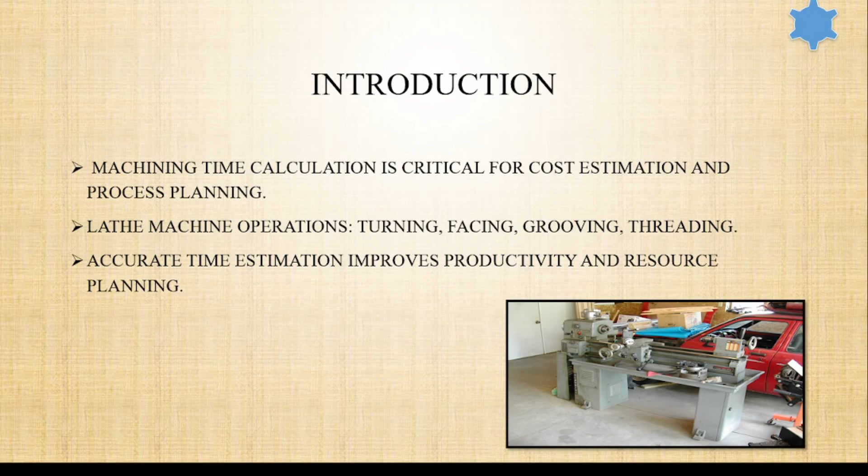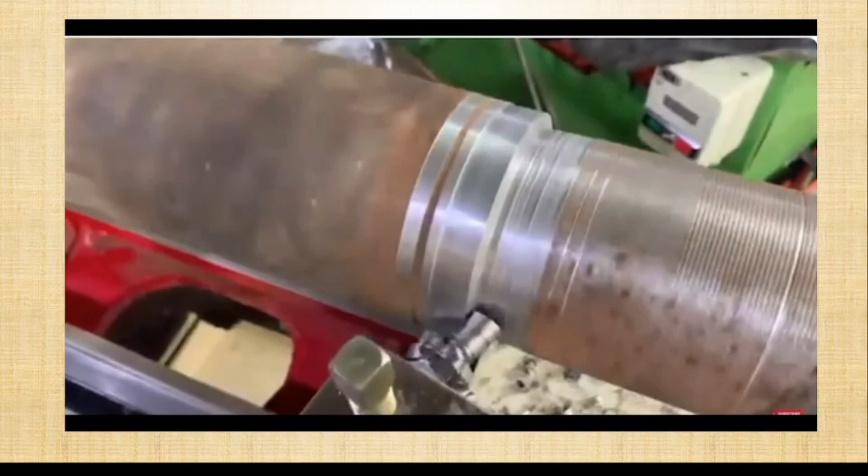Let's see one video for turning operations. As we see, with the proper parameters we can also use a heavy depth of cut, which ultimately reduces our production time.

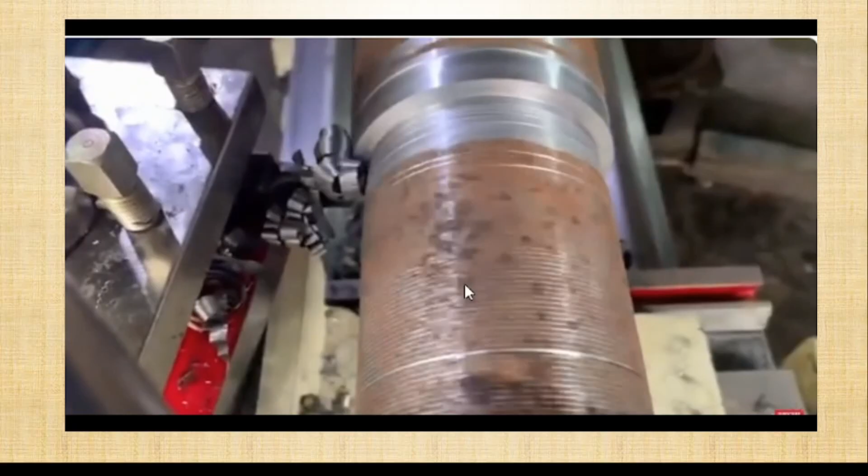Okay. Now we move toward our basic formula. Our basic formula is length of cut divided by feed into spindle speed, where the length of cut is the workpiece length plus approach allowances. Workpiece length means the total length of the part into depth of cut. Suppose the total length is 50 mm and the depth of cut is 2, then 50 into 2 is the workpiece length. And approach allowance is the safety distance.

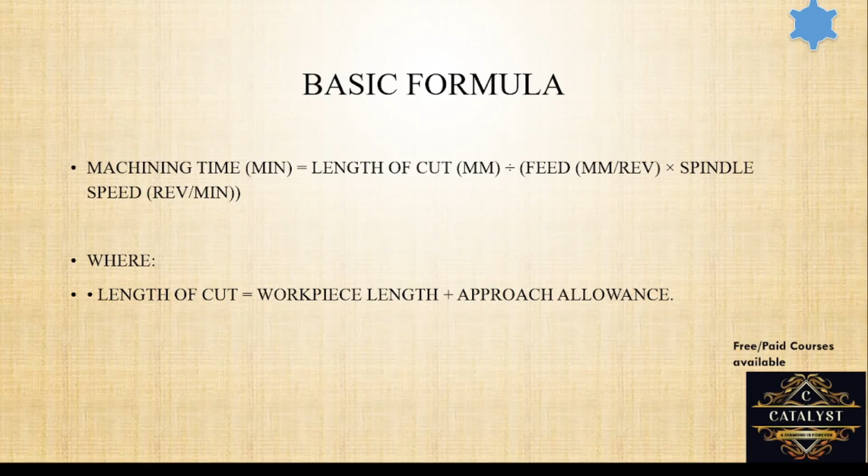When the cutting operation is performed, the safety distance we take is approximately 2 to 3 mm for the calculation, but in a practical case we take 5 to 10 mm for CNC machines. And feed rate depends upon the tooling and workpiece material.

Spindle speed, we all know how to calculate. Those from an engineering background all know pi D N upon 1000. This formula is available in the Hazra Chaudhary book. VC equals pi D N upon 1000.

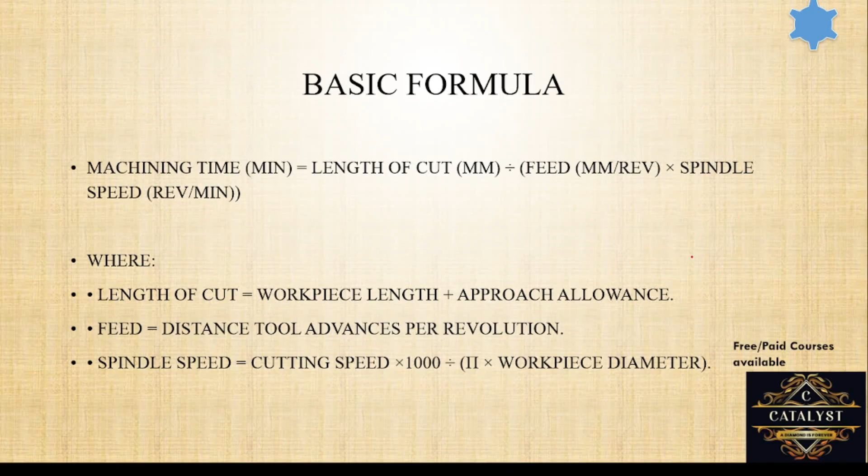Cutting parameters. Cutting parameters play a major role in our machining time. First of all is the cutting speed. Cutting speed mostly depends upon the material and tool. Suppose we take aluminum material, the cutting speed is different, and for mild steel, SS, duplex steel, K110, K30, these are the industrial grades, the cutting speeds differ. According to that cutting speed, the feed rate also changes.

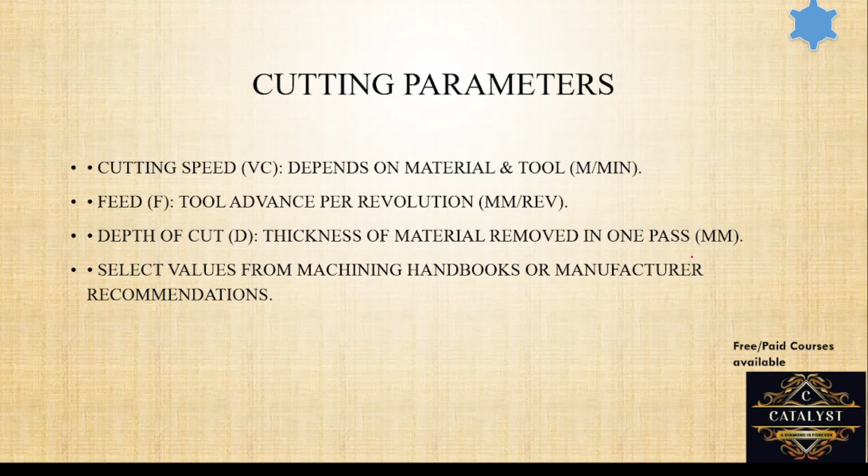Depth of cut. Depth of cut means in one pass, how much material is removed. That is the depth of cut. All these parameters you will take from the handbook or the manufacturer recommendations. Manufacturing recommendations you take from the sites, and also you can take from theoretical books. Those are both options.

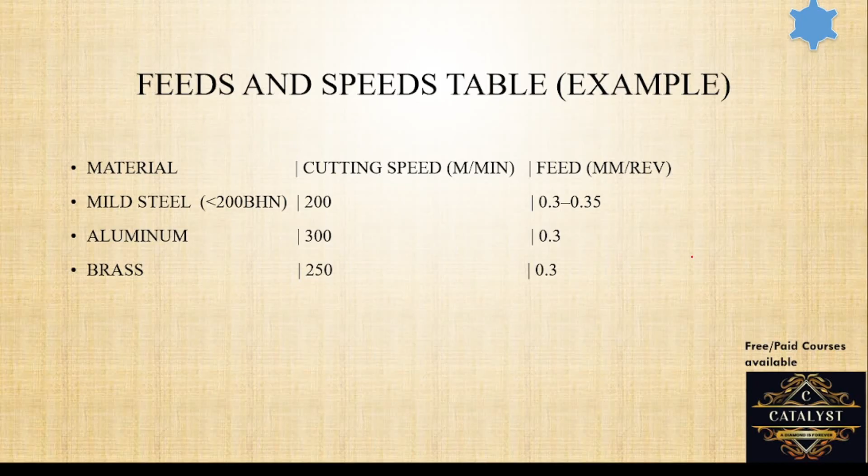Then we made one table for a practical example. We have taken three materials: mild steel, aluminum, and brass. For the three materials we segregate the cutting speed and feed. Cutting speed is measured in meters per minute, feed is measured per revolution. In this case we see 300 meters per minute for aluminum is higher because aluminum is a lower weight material.

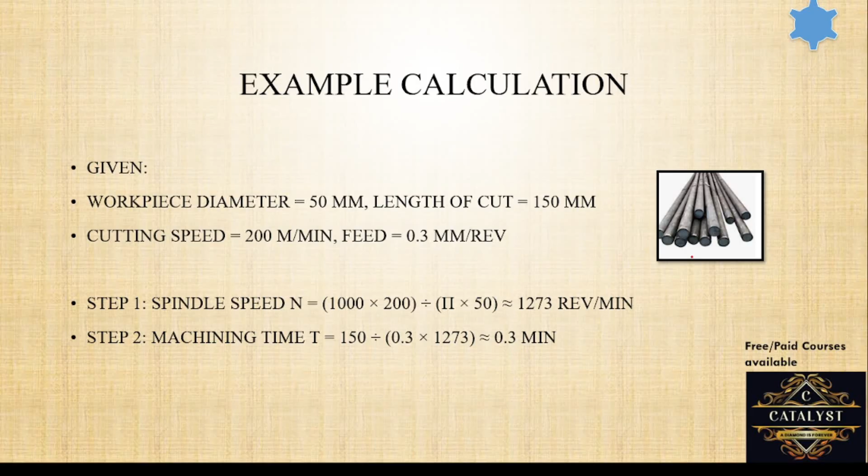Okay, then we move to our example. We have taken a bar of 50 diameter, the length of cut is 150, cutting speed is 200 meters per minute and feed is 0.3. In this case there are simply two steps. First, the spindle speed is calculated by pi D N upon 1000, with VC as given, 200 meters per minute, and the spindle speed we calculate accordingly. Machining time depends mostly upon the spindle speed and the feed, and according to that we calculate 0.3 minutes.

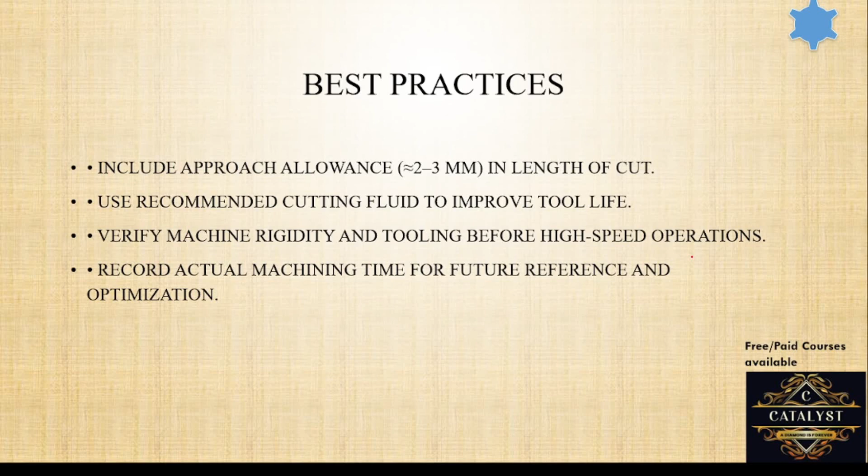Then finally, summary. In the whole presentation we saw how to calculate machining times, and that cutting speed depends upon the materials and tools. With proper feed and speed we get appropriate time.